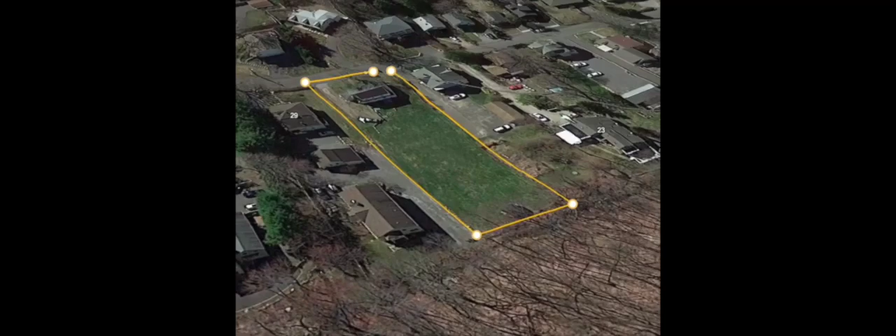This is the second public hearing of the evening, IW 24-19, 27 Abbott Avenue. A plenary ruling application for the construction of 10 residential townhouses with associated drainage and landscaping within the upland review area of wetlands and watercourses. Owner Veton Alimi, applicant Brian Carey.

And Caleb will read in. Yes, so we have the documents. We have the site plan, proof of notice by applicant to water company, proof of notice by applicant to the Commissioner of Public Health.

Wetlands and watercourse delineation, soil report by a soil scientist, drainage report, engineering reports and analyses, and additional drawings to fully describe the proposed project, any filling, excavation, drainage, or hydraulic modifications to watercourses, description of the ecological communities and functions of the wetlands or watercourses, and the effects of the proposed regulated activities on these communities and wetland functions.

Description of how the applicant will change, diminish, or enhance the ecological communities and functions of the wetlands or watercourses involved in the application and each of the alternatives, and a description of why each alternative considered was deemed neither feasible nor prudent. Analysis of materials to be deposited within the affected property, measures which mitigate the impact of the proposed activity.

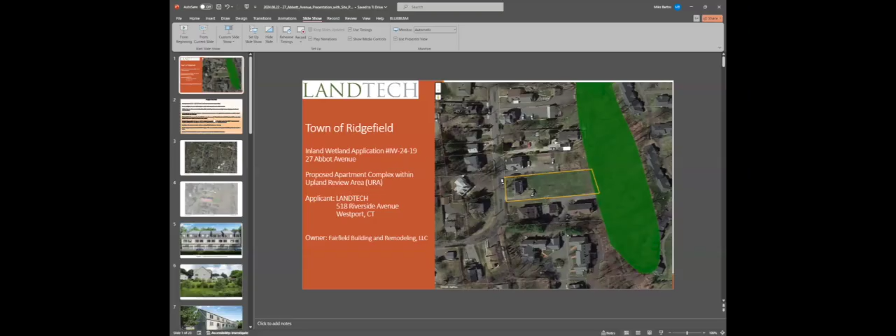You see where it captures the naked lawn on our project site, but you also see the significant and nice development that defines much of this area. A lot of that development is within the 100-foot upland review area.

We came before you again last year, around this time, with a proposal for 14 townhomes on the project site that would maintain a 22-foot buffer from the offsite wetland. Still larger than much of the development in other parts of this neighborhood, but something that you folks, and some folks who are no longer on the board, took issue with.

We had several public hearings together. Members of the public participated in those hearings, and a couple evenings of deliberation ultimately ended in a vote of denial. And in stepping back, figuring out how we could respond...

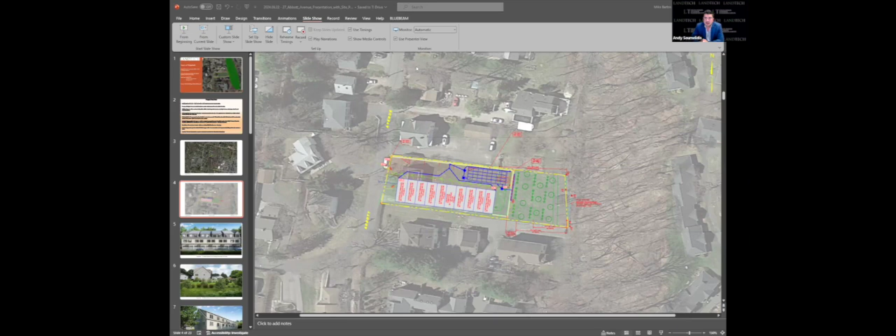So with that, I'll turn things over. I think, Andy, you're next in our batting order, if I'm not mistaken. Good evening, for the record, I'm Andy Soumelidis. I'm a principal and professional engineer with Landtech out of Westport. Also with me this evening is Anthony Zemba, who will touch upon our landscape plan and the wetlands.

Just to jump back a little bit, the site is 0.44 acres and is improved with a single family residence constructed in the 1950s. As some of you were on the previous board, I think all of you saw the proposal for a 14-unit townhouse development, which has since been reduced to 10 units, and I'll go through that. The property is serviced by public sewers, water, and natural gas.

There's no wetlands or water courses on the site. The regulated area does encompass the eastern portion of the property, but the wetlands are just off to the east of the property boundary. As Attorney Klein mentioned, the previous buffer was 22 feet and has been increased to more than 75 feet. You'll hear more about the ecological functions of the wetlands.

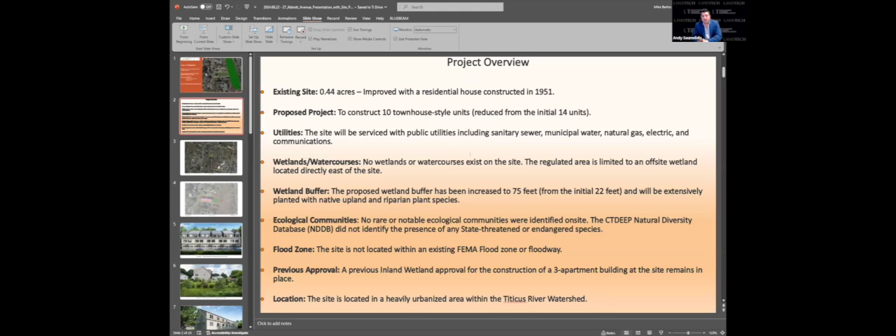No flood zones on this property, no floodway associated with this property. There was a previous approval from the Wetland Board for a 3-apartment building, which still remains in place. The site is located in a heavily urbanized area within the Titicus River watershed.

Here's an aerial of the proposal overlaid on an aerial. The purpose of this is to show the proximity of some of the surrounding adjacent properties and their proximity to the wetlands and what we're looking to propose this evening. Again, these are the 10 townhouse units with a driveway serviced off of Abbott Avenue.

Here in blue, you see the stormwater facilities, this retaining wall, which I'll talk to more in detail as we go through the site plan, and a pretty robust landscaping plan. This is where we increase that buffer to 75 feet from the wetlands. Again, you can see some of the close proximity to adjacent impervious areas directly adjacent to our property, structures and the such, well within that 100-foot upland review area.

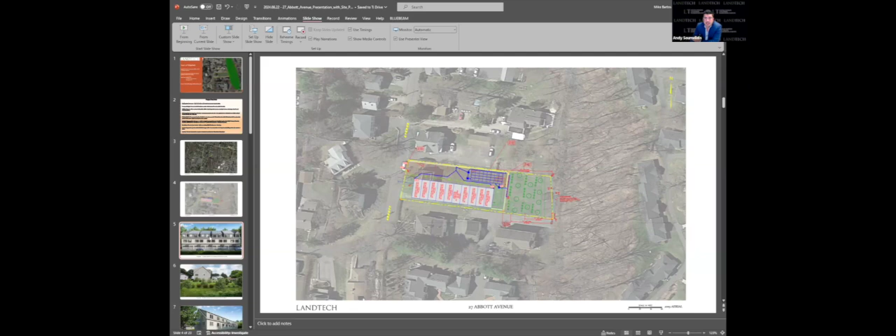Since we had some time between our last hearing and this, what we did want to show you, and again not really part of your purview, but probably some concerns of the neighbors of what this thing's going to look like, is the aesthetics of this building. The owner of this property is a local builder who does high-end residential construction, and you can see these high-end finishes throughout these renderings and what they will look like.

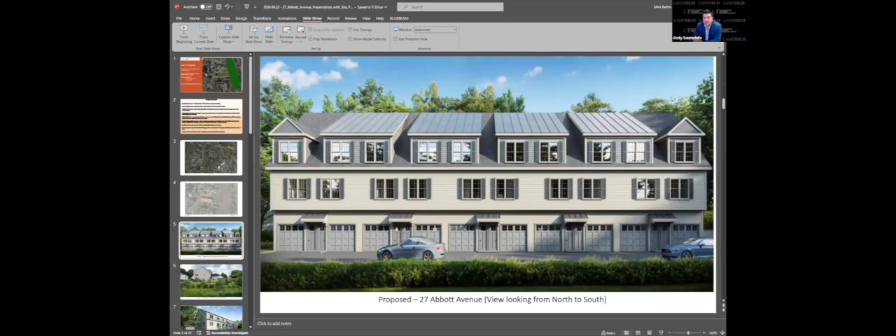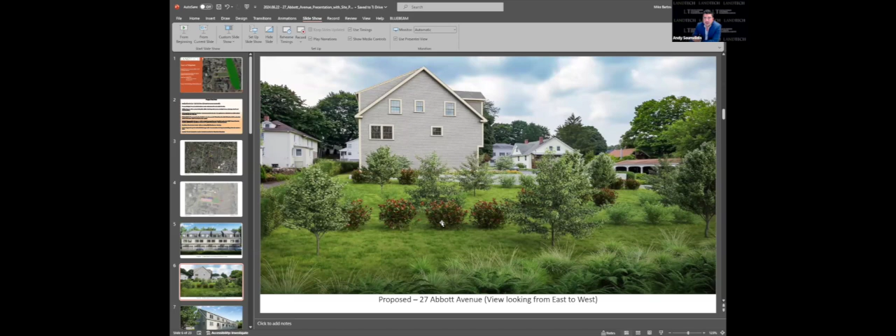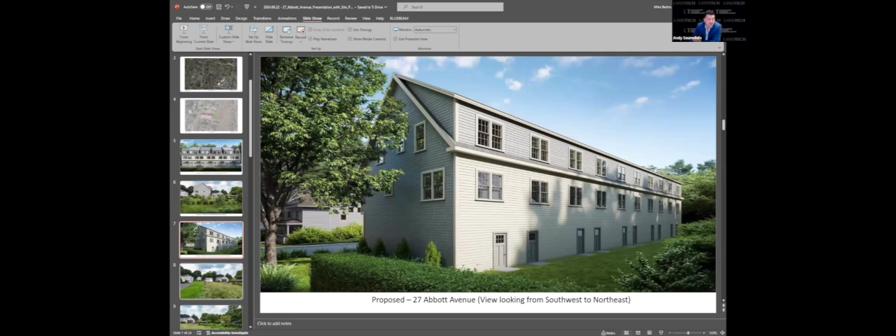Here again, this is standing on Abbott Ave and looking at the back of this building. Again, here's that driveway. This is the front of the building, and this is the back of this building. Just showing another perspective and rendering of what this building would look like if constructed. Here are the existing conditions.

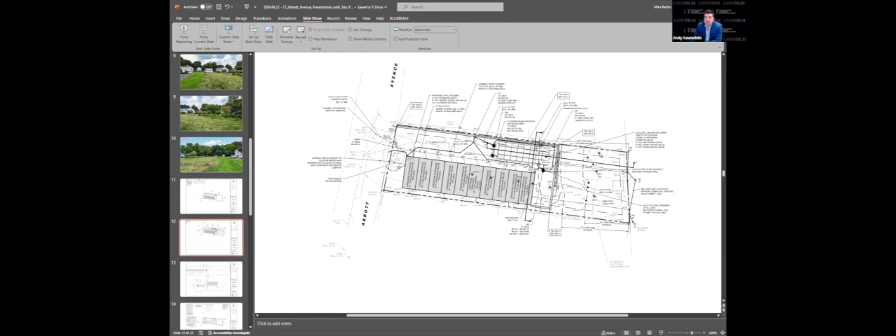In terms of the stormwater design, very similar to what you folks saw the first go around. All the roof area, all the impervious area of the driveway, it's all being collected. The driveway is being collected via 2 deep hooded catch basins. Those are then being piped to a manhole, which then go through what's called a hydrodynamic separator. It's a mechanical system, again, removing sediment and ultimately into a 32 Cultec—those are those plastic chambers surrounded by crushed stone that help promote infiltration. That all overflows and outlets to a level spreader on the downside of that retaining wall, which would then go over 75 feet of vegetated buffer before going into the wetlands. So very similar design in nature in terms of stormwater, but we'll touch upon some more details of that later on.

We provided some larger cross sections through this, showing a cross section in both directions through the Cultec system. Again, this is slab on grade construction here of the townhouse. You have your pavement section, and then you have your drainage package here. And this is a block wall here, unreinforced, and I'll show you a detail of that.

One of the questions, which I'll go through in detail from your third-party engineering review, was how sometimes walls are designed with what's called a geogrid. What happens there is every couple of layers up, you put this fabric back that helps reinforce and tie back the retaining wall for structural support. But they also make designs where you don't need that tie back, and that's what we're proposing, and we clarified that there.

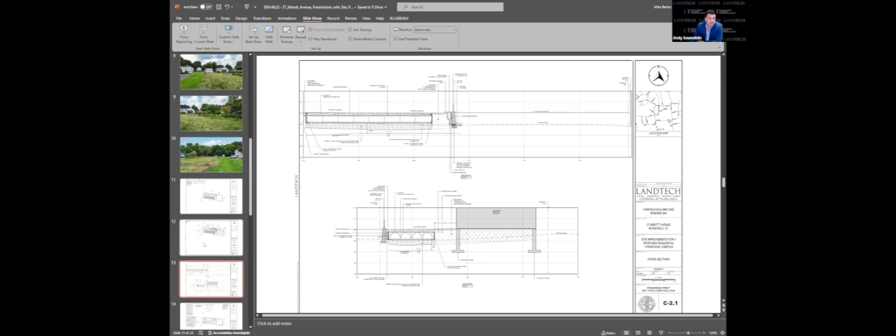Again, we provided soil erosion and sedimentation controls for the duration of construction, a proposed construction sequence. We beefed up that system, double row of silt fence with hay bales, pulling all the disturbance even further away from the wetlands, which certainly helps minimize any risk of potential failures going into the wetlands.

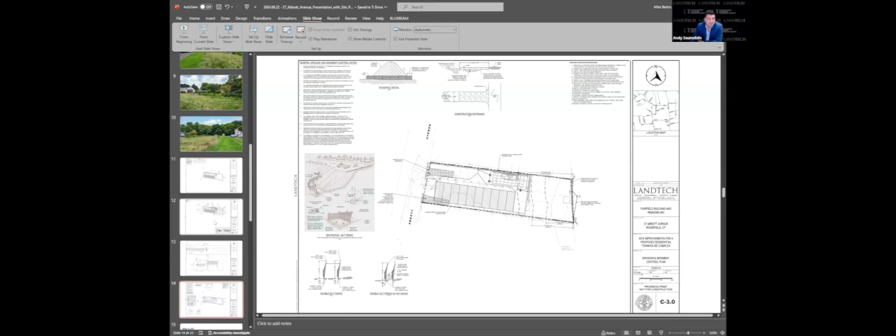So one of the big questions always is, what is LID, and can you guys do more LID? Well, we did LID the first go around, and we have LID measures again. I took this excerpt directly from the 2024 Water Quality Manual of the State of Connecticut. I'm going to read it verbatim and then show you how we adhere to that. I think everybody thinks LID is just rain gardens and grass swales. Well, it's more than just that. LID practices is a site design and stormwater management strategy that maintains, mimics, and replicates pre-development hydrology.

We do that. All the existing site drains west to east towards the wetlands, and we are draining west to east with our proposal. So we're not drying out the wetland, we're not starving it out from water resource. We're basically taking stormwater, cleaning it, and then sending it back to where it goes, infiltrating it at the source, as close to the source as possible.

Through the use of numerous site design principles and small-scale structural stormwater practices - that is what we're proposing. Small-scale structural stormwater practices distributed throughout a site manage runoff volume and water quality at the source. That's exactly what we're doing. LID includes the use of both non-structural site planning and design techniques, like rain gardens and water quality swales, which are addressed in this chapter, and the use of distributed small-scale structural stormwater BMPs. That's exactly what we're proposing here.

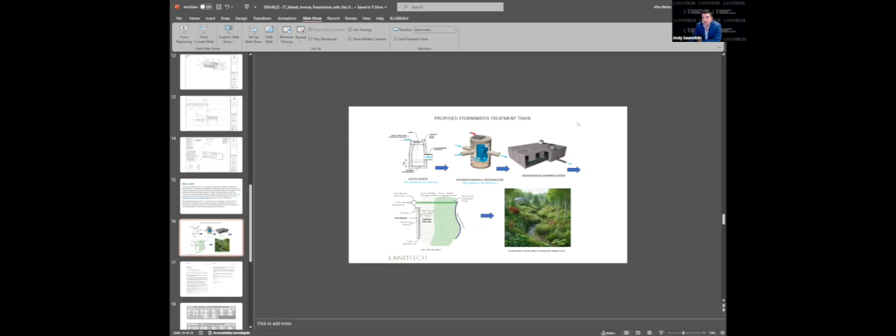So we're proposing deep-hooded catch basins, which you'll see - I did a little bit of treatment train, and I'm going to jump to that slide next. This is the fundamental objective of LID, low-impact development, and that's what we're doing here. So how does the treatment train work? We're capturing it with deep-hooded catch basins and sumps.

That provides anywhere from 5 to 10% TSS removal. Then we propose a hydrodynamic separator, proven to treat 80% TSS removal. That then goes into an underground chamber, which promotes infiltration, recharging groundwater at the source, which we are proposing. The outlet from that goes through a level lip spreader, another stormwater BMP mentioned in the manual. That level lip spreader then distributes over a 75-foot buffer of native vegetation. So that's the treatment train in a nutshell.

And these are all LID stormwater BMPs, explicitly named in the 2024 manual. I think some of the questions were, can you do more LID? Well, we've done a lot of LID. This is a small scale project relative to the 2024 manual as well. We're talking about a quarter of an acre of impervious area that needs to be treated and infiltrated. The manual really keys on a lot of large scale projects too, when you're talking about stormwater wetland ponds and detention ponds - those are typically for 1 to 5 acre development sites of impervious surfaces. This is a very small scale development relative to the nature of a lot of what's mentioned in that manual.

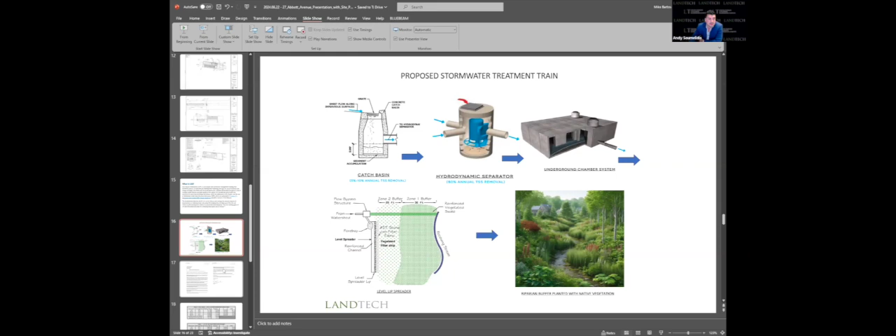And lastly, I'm just going to conclude with, we did receive comments again from Martel, the third-party reviewer. I'd say they were very minimal in substance, but I'll go through them quickly here, and then I'll turn it over to, actually I have one more slide after this, so let me just go through these quickly.

The first comment was, this does not meet zoning regs. Yes, we fully understand that. I think everybody here understands it, as well as the public. This is an 8-30g application, an affordable housing application. You do not need to meet the local regulations.

Comment 2 was in relation to that tieback I mentioned earlier. How is that retaining wall going to be built? Is there proposed geogrid reinforcement required? No, and we provided a detail showing that. The detail was already on the plan, but we enhanced that cross section to further note that.

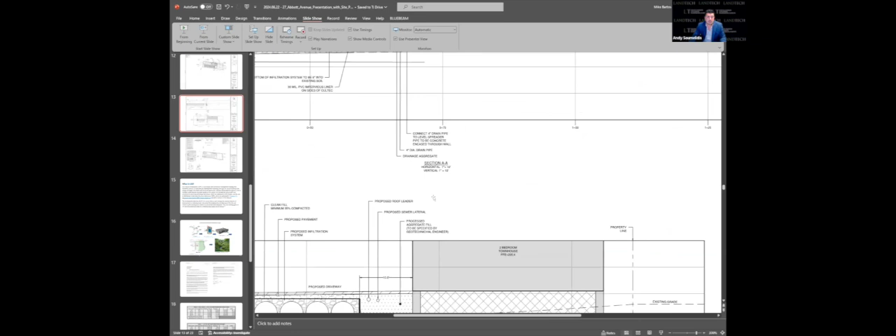Due to the close proximity of the drainage system to the wall, there was concern that this infiltration system will bypass and not function properly, going into this drainage layer behind the wall and not infiltrating properly. We added these impervious liners on the edges of the system, keeping the bottom open to promote infiltration downward but not outward. So that was the add based on that comment.

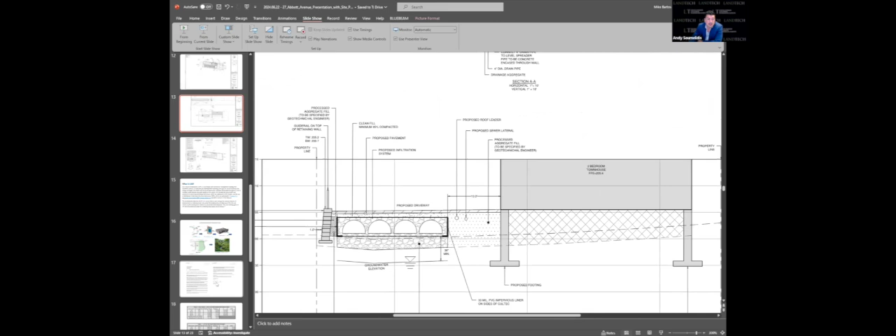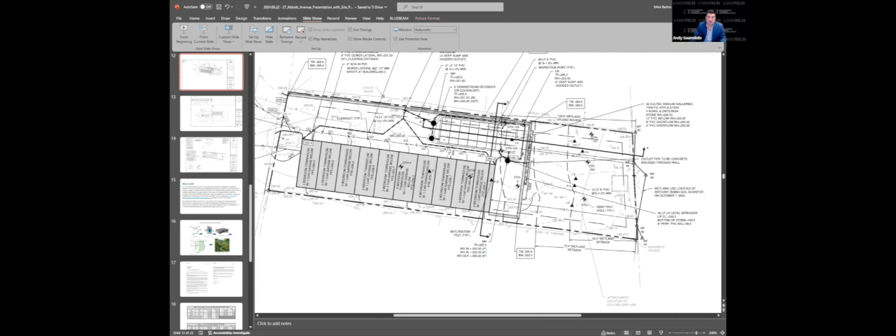There was concern about the level lip spreader bucking grade, basically going against the grade. So what we did was redesign that level spreader so it did stay level, and that can be seen here now. It's at a constant flat area rather than the concrete curbs protruding up and acting as almost like a mini retaining wall. So this will now be able to sit flush on that existing grade.

And then the time of concentration, we took a very conservative approach. Time of concentration basically means you take a raindrop at a corner of a watershed and you analyze it. I'm trying to explain in layman's terms how long it takes to get over that distance, the longest path traveled to get out of that watershed.

On paved surfaces, we use a number of T sub C of 5, a time of concentration of 5. That's the fastest rate a droplet of water can go from one end to the other. That's the number that's used, industry standard. So we modeled the whole site as a T sub C 5. We said even lawn areas are T sub C 5. And that's how we modeled the proposed condition.

Under existing conditions, we did not do that, but under proposed conditions, we maxed it out at a T sub C of 5. Again, this is a very small scale project in terms of stormwater detention and design, that even changing it to T sub C of 5 did not make our system bigger or change the design.

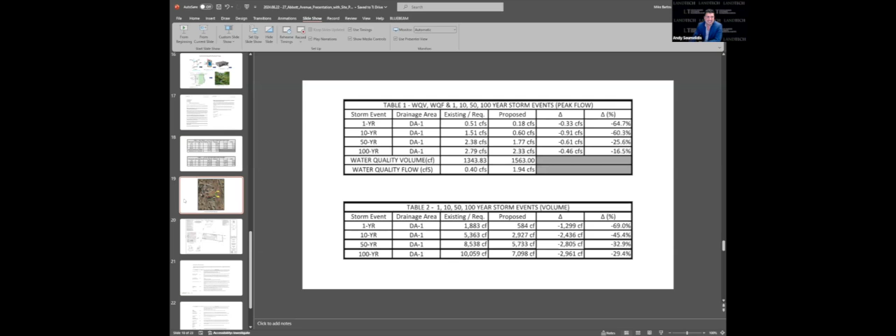Okay, please, Anthony. Okay, can everybody hear me? Loud and clear. Okay, great.

Hi, Anthony Zemba. I am a senior ecologist and certified soil scientist with LandTech, with offices at 518 Riverside Avenue, Westport. I'm just here tonight to represent the functions and values and the attributes of the wetland, which is off-site of our property but adjacent.

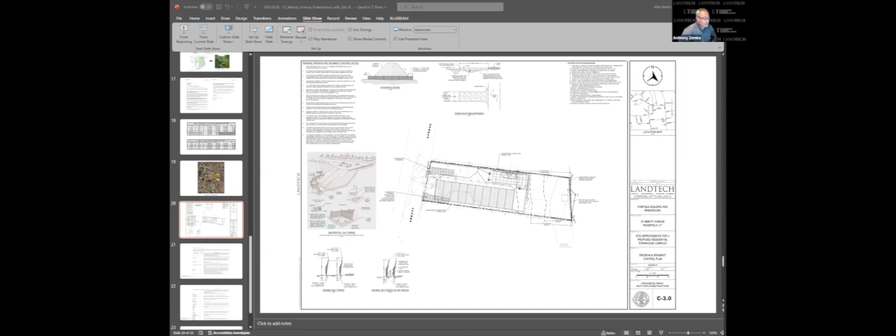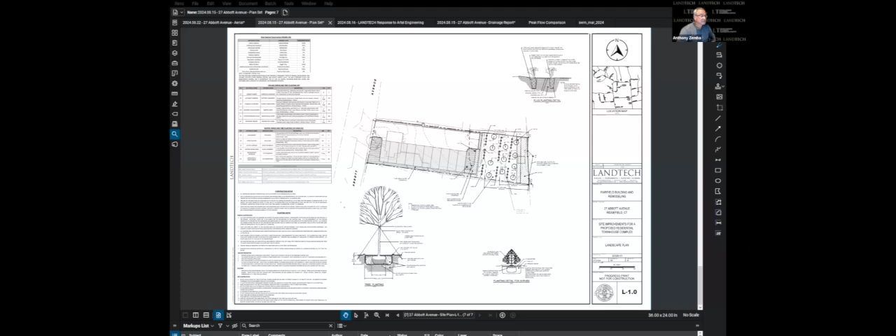Now, with that being said, there were concerns addressed in previous meetings about impacts to wildlife with development in the upland review area. Since that time, as Mr. Soumelidis had mentioned, we have included a significant planting plan that will provide multiple benefits to a number of taxa of wildlife. We have decreased the footprint of the disturbance within that upland review area. So we feel that we've adequately addressed that concern. There would, again, be no direct impact to the wetland. This is all enhancement of the upland review area.

Now, the planting plan that we put forth has 24 different species of plants representing different structural layers in the vegetation. We have 3 tree species, 4 shrub species. In the herbaceous layer, we have 17 different species, of which 10 are forbs, 6 are grasses, and 1 fern.

You can see how it's all laid out there. You do need to leave room for these trees and shrubs to grow. So they shouldn't be touching each other on the plan. There should be spaces in the middle, so as these trees continue to grow in development, they have plenty of sunlight to do so.

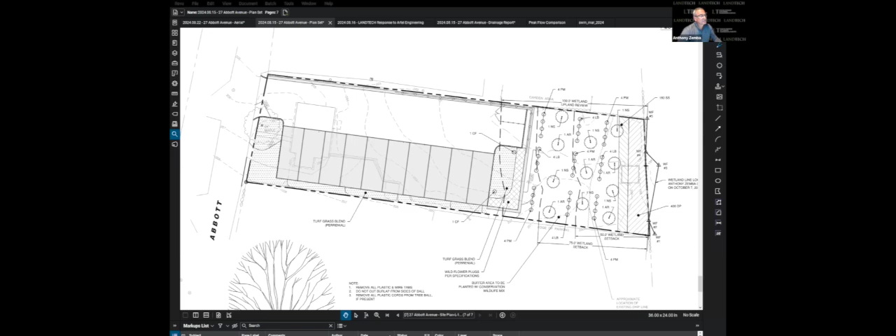In the next slide, we provide a breakdown of the wildlife value of the different species. The red maple's leaves provide food for caterpillars, which are a vital food source for bird populations. Red maples flower early in the spring and offer nectar for pollinators when other nectar sources are not yet present. Seeds are consumed by birds, and it's a host plant to the eastern spring azure butterfly.

Similarly, the black gum or tupelo: the flowers support a number of native pollinators, including various bees and flies. About 7 species of birds that could be expected to be found in that neighborhood will regularly consume the fruits of black gum. An additional 12 other species of birds that probably migrate through will also relish those fruits. The fall foliage turns a bright red-orange, and therefore it has a dramatic aesthetic value to the landscape.

The black chokeberry provides a source of food for birds as well. The flowers attract pollinators, and the dense branches offer shelter and nesting cover for small birds.

American holly similarly has persistent fruits eaten by a number of birds, and those fruits are usually retained on the branch late into the winter, so it becomes a very important food source when few other sources may be available. The dense, evergreen foliage provides shelter and nesting sites for birds, and again, aesthetic value on a winter landscape as the foliage is evergreen.

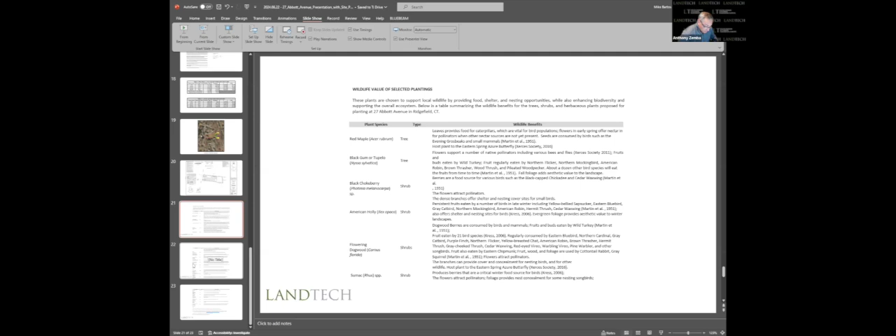Sumac produces berries that are a critical winter food source for birds. They usually don't eat those fruits until everything else is depleted, so it's a really important food source at a time of year when foraging is critical for birds. The flowers attract an abundance of pollinators, and the foliage provides nest concealment for nesting songbirds, and also some shelter for small mammals and insects.

In that slide, the actual species of birds are listed that I gleaned from the literature, and I won't read all those to save time.

Continuing on, you see this common theme here with all the plants that were selected. Sweet pepper bush has sweet-smelling flowers in late summer or midsummer used by various pollinators, with dense foliage used by nesting songbirds. And so on down the line: butterfly milkweed, purple coneflower, the asters and other composites, and even the grasses like little blue stem, Virginia wild rye, and big blue stem. These are larval host plants for some of our native butterflies. The hay-scented fern is a deer-resistant plant and provides more structural diversity to the ground cover, which can provide concealment for ground-nesting birds and small wildlife.

And then even species that are in the seed mix, which is on the last slide there.

Again, it's a larval host plant for a number of native Lepidoptera, the butterflies and moths. The seeds are eaten by different bird species, and they have pollinator and aesthetic value. So we think we've gone above and beyond the call of enhancing the upland wildlife habitat value as opposed to existing conditions, with the added benefit of aesthetic value.

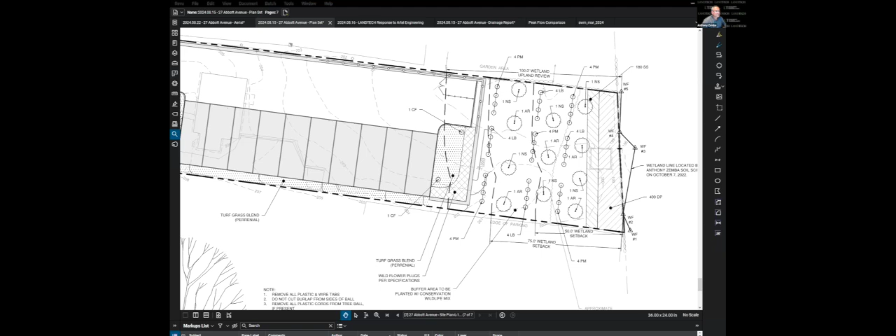Anything else? Carson? Thanks, Susan. Carson Finch for the record. Just two comments based on things from the original application. I don't think either of them are too major. That should be relatively easily addressed.

The first is, it's probably a management program, a portion of your management program to make sure that the snow plow piles don't go outside of the drainage system, aren't pushed over the wall into the wetland buffer, which, with the orientation the way it is now, seems like a high probability for someone plowing that, as that's where it would go. So whether there's signage or fencing or a management program that makes sure that doesn't happen, that would be a suggestion or a request from my end.

And the second is, I believe it was a comment from Mr. Trinkaus originally in the original application, having to do with the erosion and sedimentation control, particularly the silt fence along the property line. I believe it was on the north side, being parallel and running down grade.

Evidenced by this weekend, although this was an unusual event. I've seen it in practice now, where parallel silt fences running down grade act as a chute for water and actually magnify the impact and erosion. So unless you have end controls at the end of that downgrade segment to mitigate and catch that in a large event, particularly during construction staging, additional controls should be required if you're going to have downgrade parallel silt fence, because of where the property line is oriented.